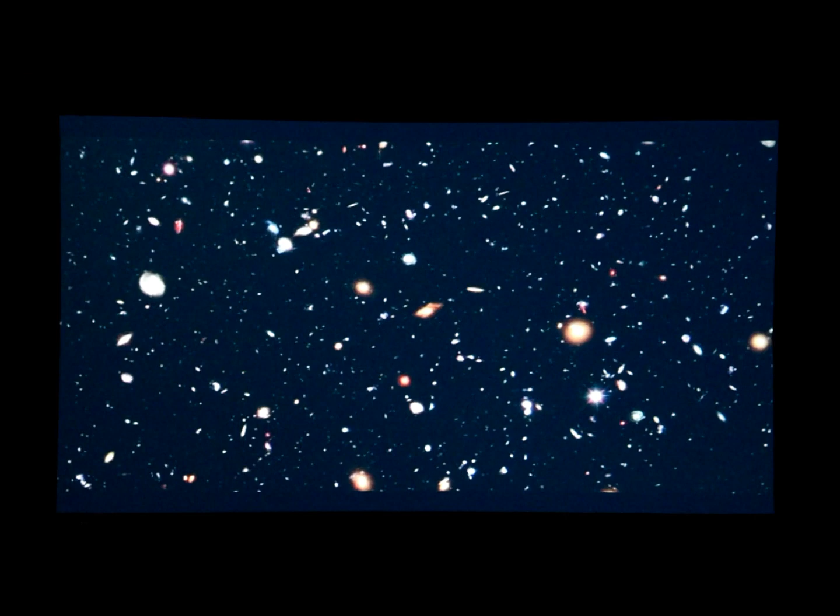As a result, although my choice of productive space has been an artistic one, spiritual space has in many ways been the primary space of my consciousness.

It is now no longer the edifice of ritual and belief that offered answers and security. Rather, it has become an engagement with the extended space of tremendous mystery, with the unknowable universe that we all live inside. This, for me, is a space of searching, of persistent inquiry, of feeling the void of doubt at the core of being human. It is an uncertain and indefinite space, which paradoxically carries within it possibilities, infinite possibility for discovery and growth.

Besides being a retrospective, this lecture is also an introspective. My aim is to share some of the inner processes and personal ideas that underlie both my body of work and my mode of practice.

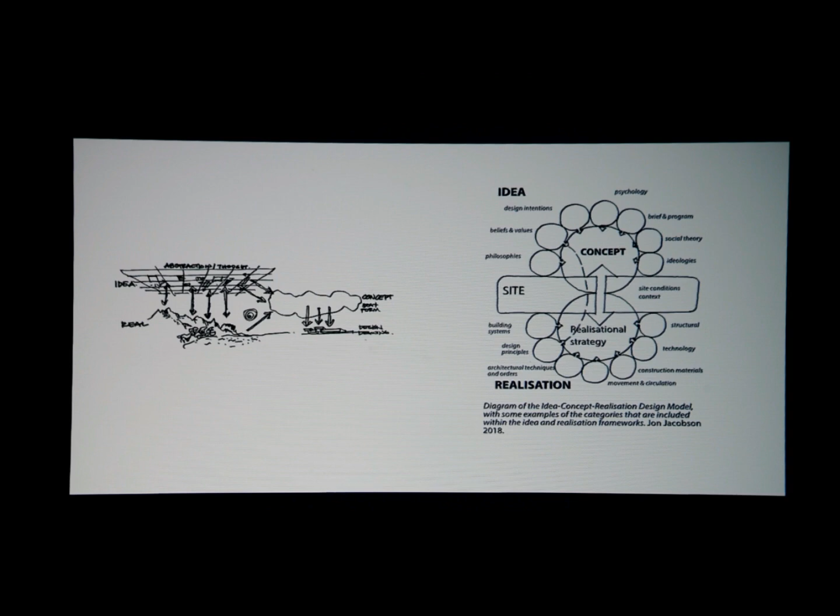What exactly is an architectural concept? I've discovered it's different for every architect I've met. For me, it is the bridge between idea and form, neither purely abstract nor purely material. It can be a poetic image, comprised of metaphor, symbol, or analogy, or a dream image, or a vague complex of images—anything that can fluidly carry meanings through the forms of this world.

A conceptual design process is profoundly integrative, fusing together many intentions and meanings into an indivisible whole. This design method allows conscious control over the relationship between the ideas, the forms, and the poetics of the project. At any point in the building process, it's possible to trace back and critically assess whether a particular form aligns with the core ideas.

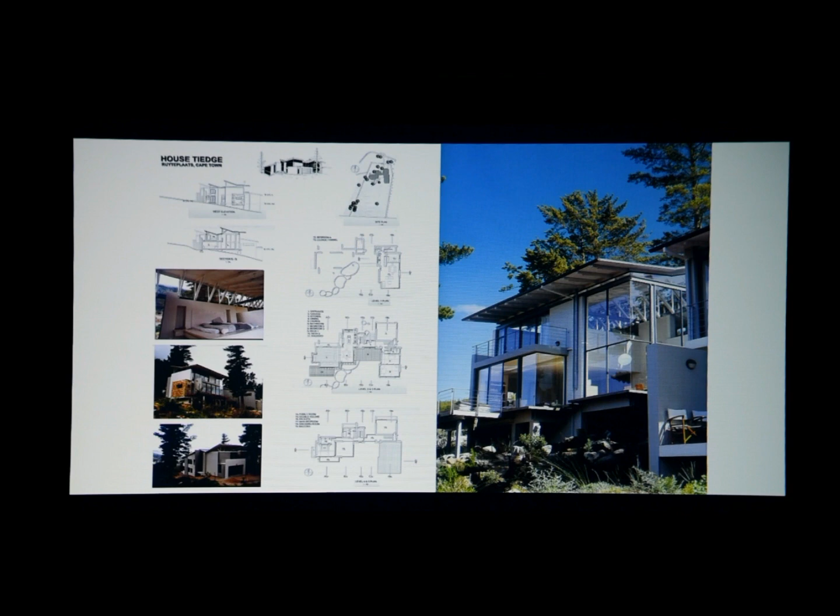In the early years of practice, design started with a diagram, resolving pragmatic concerns like orientation, circulation, and program, then proceeded to the plan. The final step was to intuitively overlay the plan with compelling architectural gestures. Here is an example of a very functional plan with a lovely floating roof, but no real central unifying concept.

The first works considered conceptual wholes were furniture pieces—these dog-like forms from the mid-90s integrated functional requirements with tectonic and sculptural concerns. The first building where I think this was achieved was this small building linked to the main house at Bo Constantia, in a way not unlike a large piece of furniture.

It is a pavilion on a narrow shelf on the mountainside, for meditation and relaxation. The intention was for an immersive experience of landscape, for the building to harmonize with and entirely disappear into its surroundings.

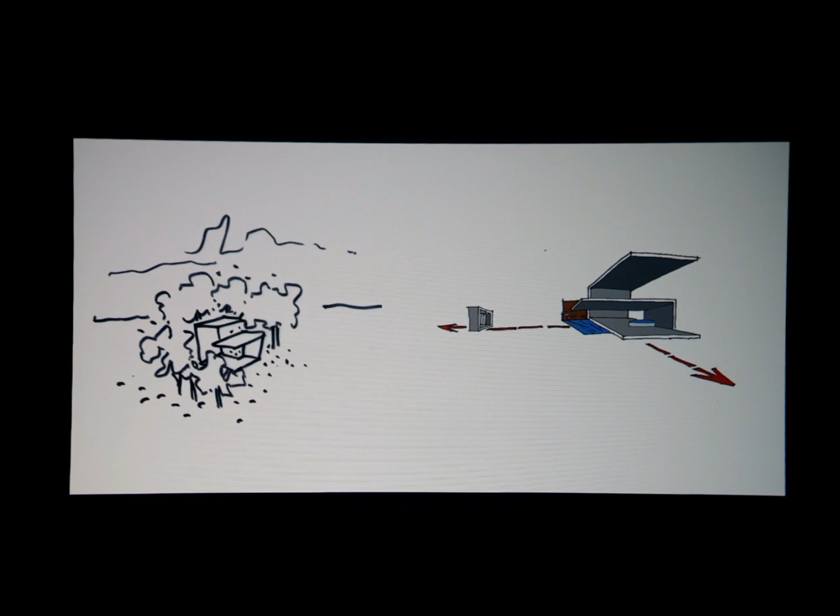The concept was a treehouse-type sculpture, nestled between the trees. It developed into two interlocking forms in a cruciform arrangement—one anchoring along the contours, the other thrusting out into space.

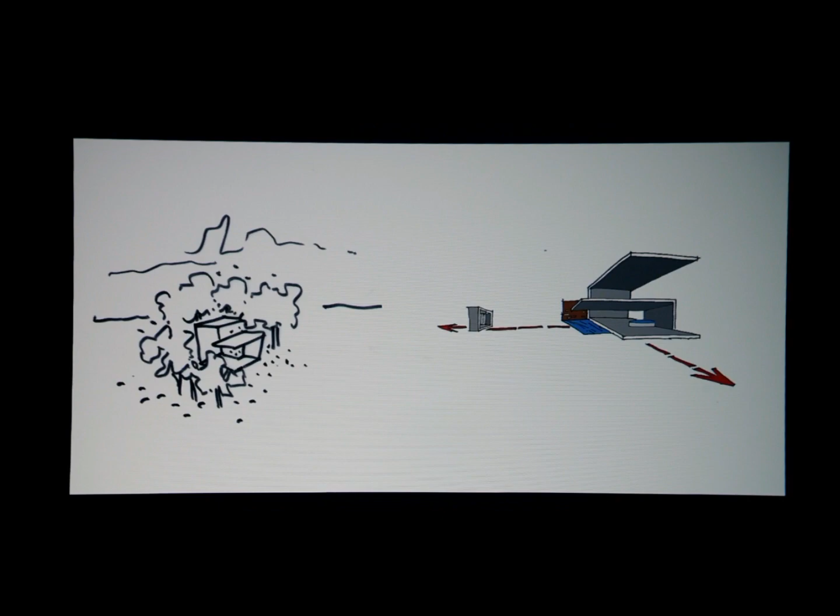The crossing of these two forms creates a complex range of spatial conditions, each with its own subtly unique character. The tension between them creates an ambiguity, a certain strangeness, a constantly shifting perceptual field—so much, really, out of this very simple gesture, a minimum of means that was more than just the sum of its parts.

I was studying cosmology and astronomy at the time. The world and our endless preoccupations within it was feeling tiny and insignificant. I think this was the first taste of grappling with the notion of the infinite in architecture—this feeling of open-endedness, of multiple meanings, and a lack of closure, true both of the world we inhabit and of the inner universe of consciousness within us.

How can an understanding of concept as a dream image contain the meanings of the project and assist in expressing them, both in the overall design conception and in every detail of the building?

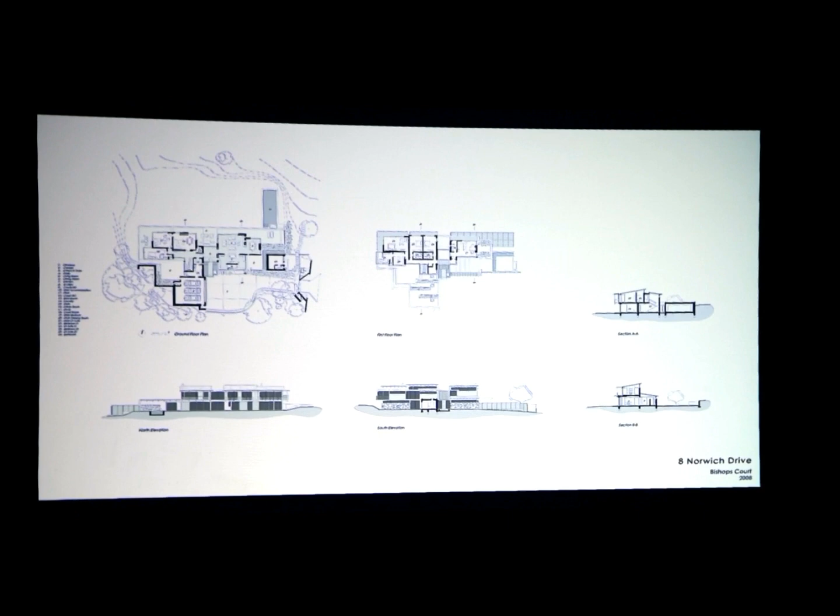I didn't interfere. I advised them on technical aspects of design realization, but my main contribution was the architecture, with the embedded meanings, and in maintaining the coherence of the concept in the face of constant, ongoing design development.

The concept started out as a response to the site, a clearing surrounded by trees. It is light, permeable, and carefully scaled down into a number of discrete masses and planar elements.

The house is organized around activated courtyards, it has a natural materiality, and it tries to form a sympathy with its site. This is the architecture. What about the design?

The organization and circulation were designed in partnership with the client. Every detail, the stair, the fireplaces, the kitchens, the bathrooms, were intensively interrogated and evolved with the clients.

Ultimately, every single one of the thousands of elements of this house reflects the client's complex spatial understanding. And this, I think, is how comfort should be defined.

Juhani Pallasmaa speaks of the difference between a house and a home. A house is the formal architectural product that contains ideas, philosophies, and values. It is as eternal as the ideas that it's built upon.

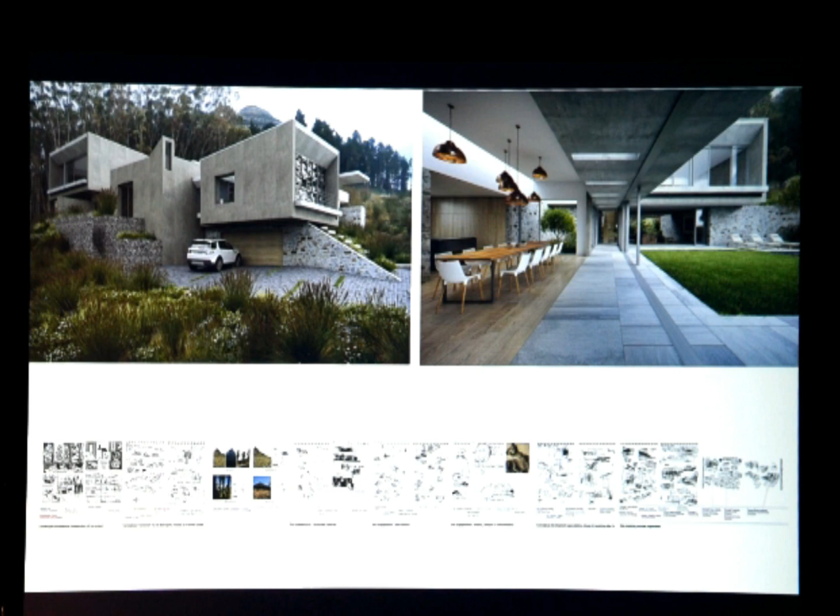As part of my master's at this university, I discovered the answer lay in my design process. I studied the conceptual design development of the current project by analyzing the drawing trail in my design notebooks. The concept for this house draws on both the rockiness of its adjacent mountainside and the permeability of its surrounding tree plantations.

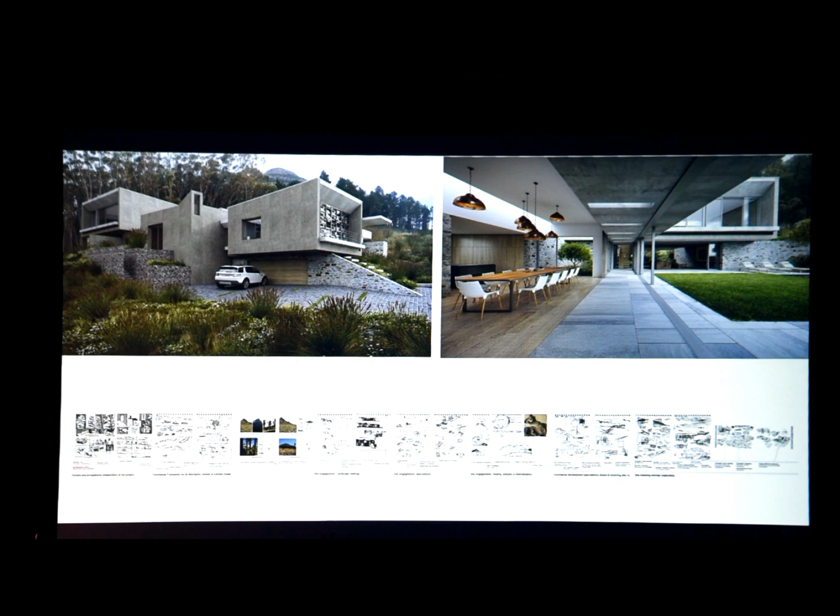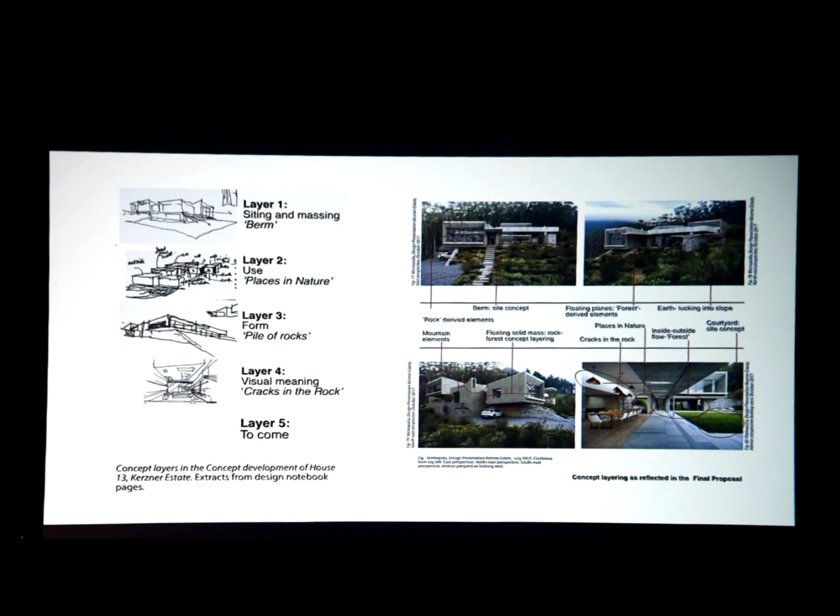These are some discoveries about design process from the masters. Firstly, multiple concepts are utilized for different operational areas of the house, like planning, siting, massing, etc., and are then layered into a sort of concept complex. A few conceptual options, sometimes contradictory, are often considered simultaneously and pursued in parallel right until the last minute.

The design process is uncertain. It doesn't grab at the first idea that comes to mind. It carries on and on, looking to accumulate more and more.

Finally, I have a number of criteria that I use to select a suitable concept for a project. Some of these are that a concept should be universal, easy for the client to understand and therefore to value, and not change. It should not be entirely dependent on any one element, in case it gets cut. It should be capable of translation along multiple tectonic paths, in case there's a problem with the budget.

This construction of concept is fluid and flexible. It allows the poetics to hang like a cloud over the project, raining on it occasionally as it changes and evolves.

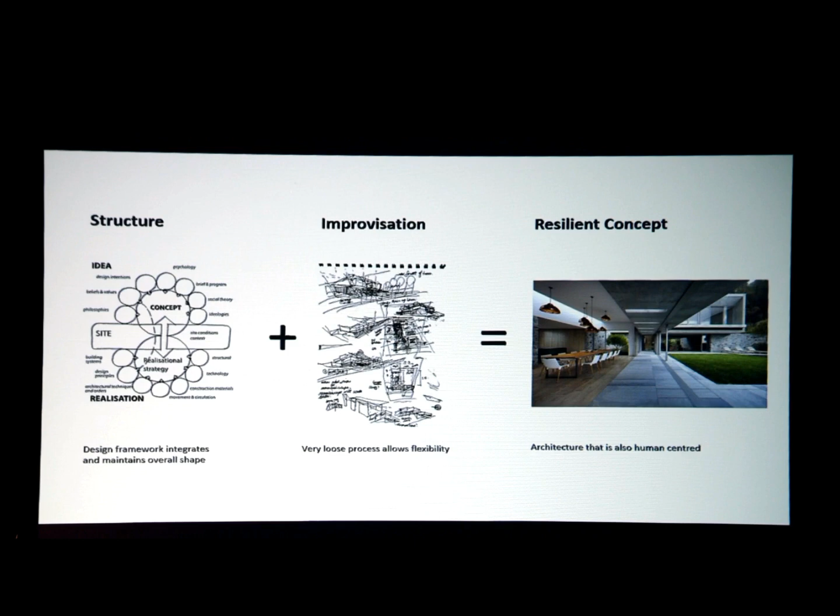What is the medium in which concept is grown, nurtured, and developed? In my case, it is drawing. When I started studying architecture after 3 years of medicine, I couldn't even draw a stick man. As a result, it is more of an investigative tool than an artistic tool.

In a typical sketch design process, a long, uncertain, and convoluted stream of drawings explore, search out, and eventually integrate ideas into a concept.

Somewhat independently of a particular project, I draw to investigate the underlying structure of things, in this case landscape, in order to understand its language, its rhythms, and its characteristics.

Drawing is also a way of gaining an intimacy with subject matter that one wishes to understand better and that one wishes to grasp and use poetically.

As discussed earlier, we are very concerned with the bridge between idea and form, with concept. A crucial function of drawing for me is to bring out new conceptual material from the subconscious, from where it has been brewing and brewing.

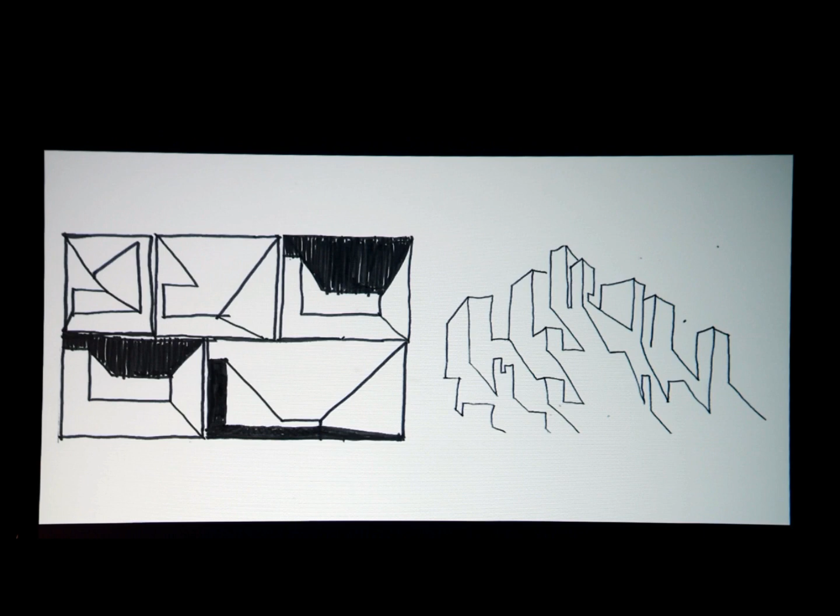Having spoken about the meanings, the conceptual framework, and the design processes that enable our architecture, we will now, for the rest of this talk, address our contextual approach to landscape and the profound effect it's had on shaping the character of our architecture.

This is the landscape that is the backdrop to many of our projects: weathered sandstone rock formations, granite boulders, forested valleys, rugged cliffs, the endless flat horizon of the sea. The sheer power of the landscape and its bleakness make all human efforts seem small and puny. The South African poet Stephen Watson, in his essay A Version of Melancholy, speaks of the entire futile effort of importing continental culture into the hugeness, the dryness, barrenness, and sheer indifference of our landscape to its human occupants. Our stylish attempts at imported architecture often look out of place, especially when not buffered by other buildings, like in a city, or by trees.

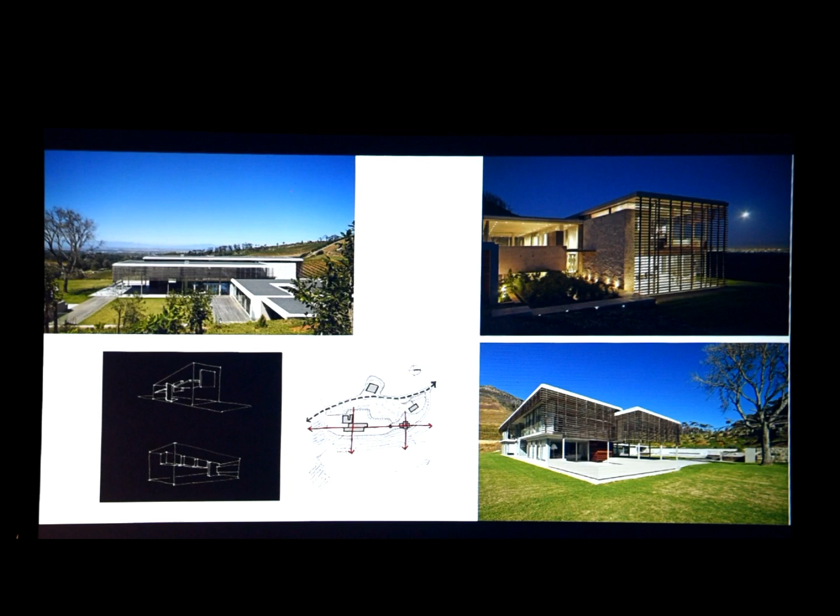But these cubes were not really solid. They were suggestions of form, with all the elements of enclosure and shelter reduced to planes, floating disconnected within them. Large voids were introduced, enclosing shadows. This concept I called sheltering sky, to encapsulate the feeling of being contained while floating in tension, in a state of becoming, on the edge of vastness.

And the vastness, the infiniteness of this landscape passes through this house like the wind. There is no definite sense of enclosure. Everything continues. There are strange gaps. There is ambiguity. But there is also form, and the form is pure.

The spatial planning concept for the house was called Heart of the Home. It places the double volume kitchen, dining, family area in the center not only of home, but of landscape, with courtyards that radiate out in all directions. The transparency creates an immersiveness which is very intense and very real.

At the same time, the house enables a lifestyle which is urbane, sophisticated, and highly social. The extroversion of its public areas is matched by the privacy and seclusion of its bedroom section, which hovers quietly overhead.

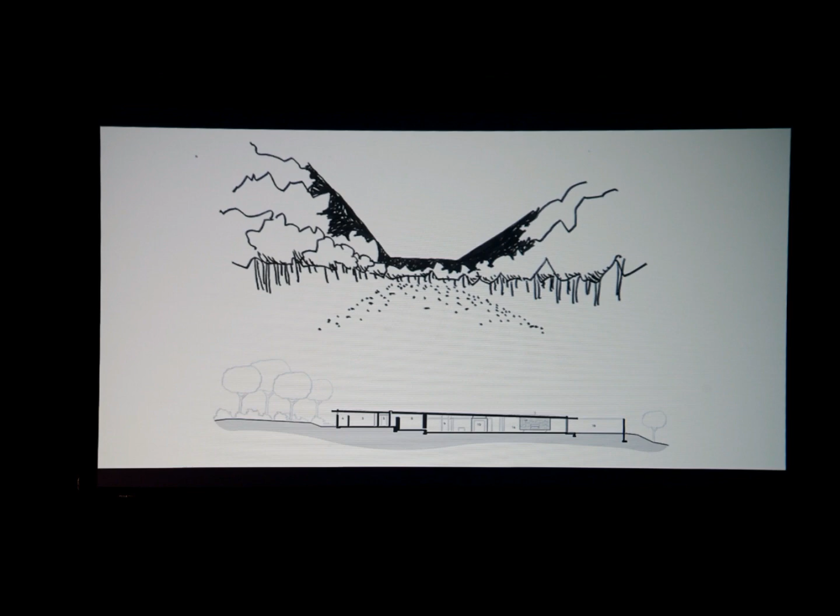The concept was a floating tree canopy of a roof, levitating over a stepped ground plane with detached wall elements under it. The real walls are the trees that surround it. The form of the house was penetrated by many courtyards, bent around a tree, completely subordinated to its surroundings. The notion of an ideal form and of a geometric order was eroded and eroded until it disappeared.

All that is left is a set of relationships with the outdoors and between detached architectural elements, the space between. And the space between relies on ambiguity for its power and its meaning. It is really the space that is left over for interpretation, for the viewer's imagination to complete the picture. What is this conversation between water, massive concrete, and hanging rock really about? They resonate with multiple meanings that don't lead to swift conclusions, but rather to a sustained state of trying to grasp the elusive.

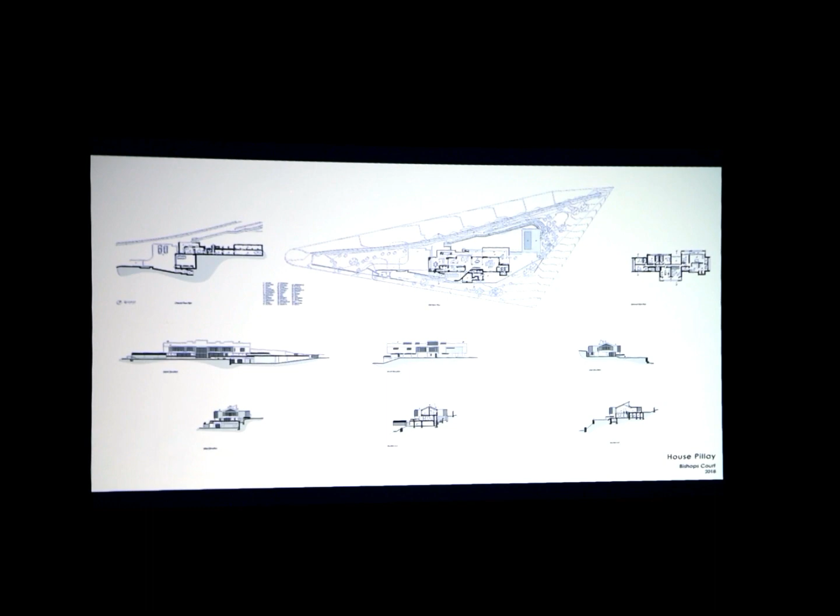I haven't spoken much about culture and architecture. This project in Bishop's Court, an elite suburb with a very traditional identity, mainly freestanding villas in a variety of historic styles, illustrates another type of dialogic relationship with the landscape. This time, it is the poetic reinterpretation of a typological form, the pitched roof, to resonate with the language of its surroundings.

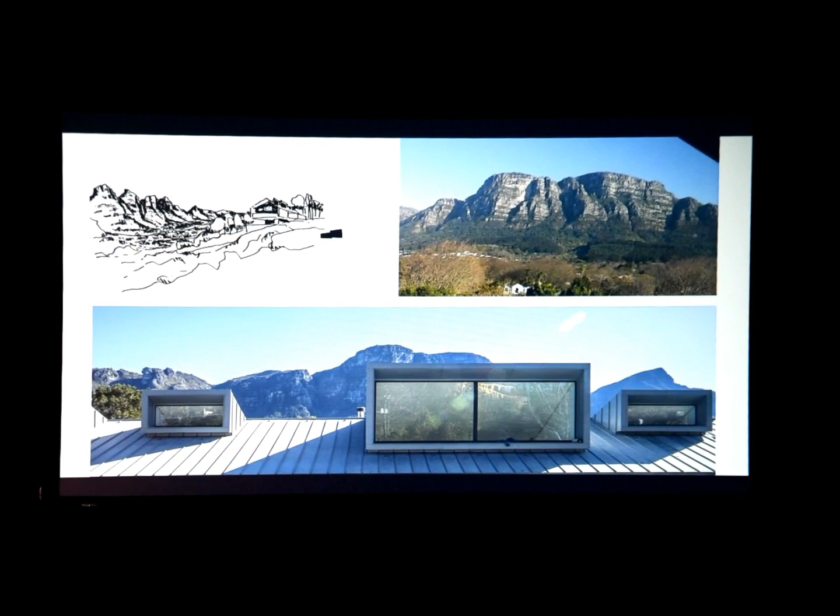This was an alteration to a very conventional, compartmented revivalist house with no relationship to ground on a very steep, oddly shaped site. It needed to be recast as an open, flowing, immersive space, strongly bound to its location.

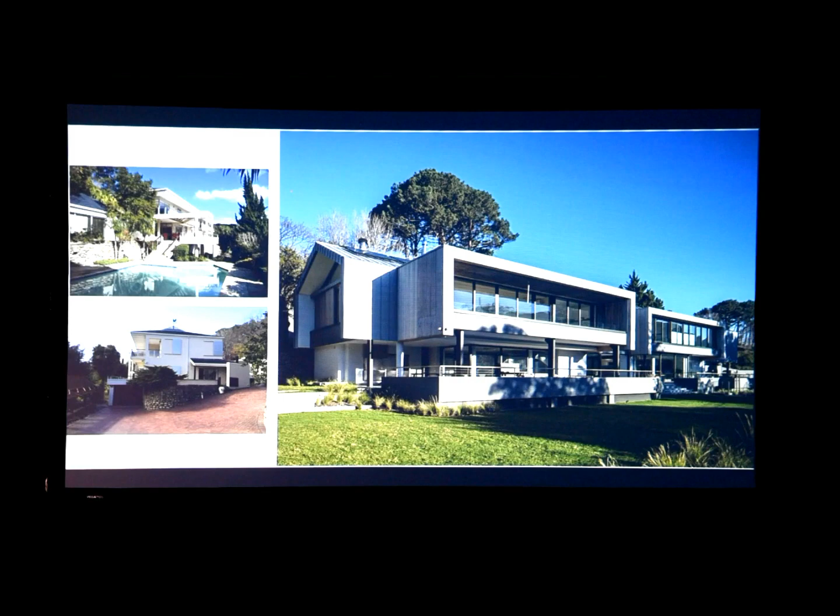The entire top floor is interpreted as roof, with dormers that are elaborated to echo the powerful cliffs of the back of Table Mountain. The house becomes a sort of floating mountain itself, new additions outside of the existing envelope are expressed as separate timber-clad, buttress-like elements.

The mountain metaphor is extended to the entrance procession, culminating in a massive abstracted rock overhang. The dormers also bring in light and views in unexpected ways into the interior.

As an abstraction of typology and landscape, the composition relies on the clarity and precision of its junctions and on the purity of its forms for its eloquence. And what started out as an interpretative journey prior to this project has continued into new metaphoricities of roof, yet to find a home.

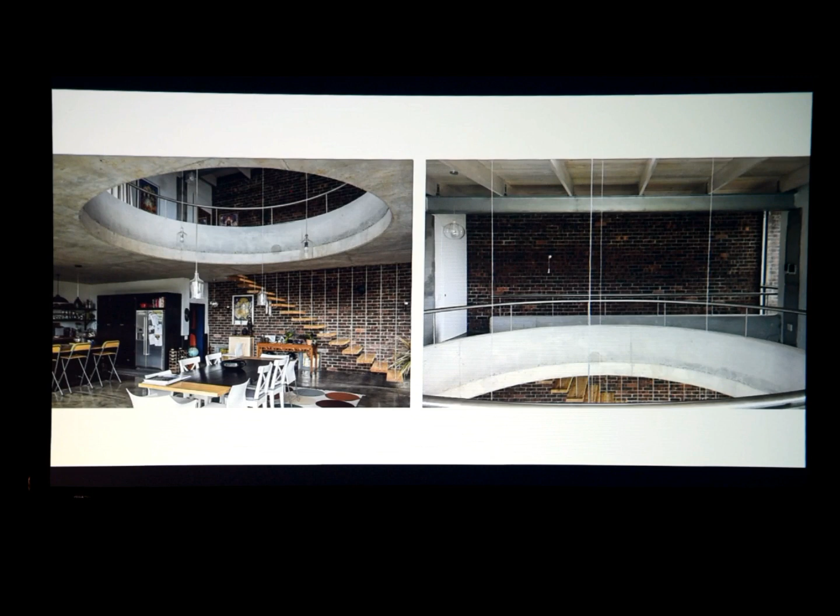And it has also manifested in the search for vitality in architecture, for a sense of livingness in the built environment. The jazz theorist Ted Gioia talks of jazz as the imperfect art because, although it is undeniably art, it embodies the unfolding incompletenesses of the lived moment. And I think that this sense of incompleteness and becoming can be embodied in architecture in the incomplete application of design rationality and in allowing our clients' improvisational spatial behaviors to coexist with our ideal geometries and spatial conceptions.

What of actual spiritual experience? The Canadian philosopher Charles Taylor, in his book A Secular Age, identifies two personalities: the modern buffered personality and the traditional porous personality. The buffered personality rationally selects which experiences of the world to take in and which to exclude. That's us, based in mind, filtering everything, ruled by an absent God who is transcendent.

The porous personality is unmediated. There are no clear boundaries between what is inside and what is outside the psyche. Everything flows in. This has been associated with the traditional and the pre-modern, and the mindset that experiences a so-called enchanted world, a God that is immanent, saturating the rocks and the trees with being.

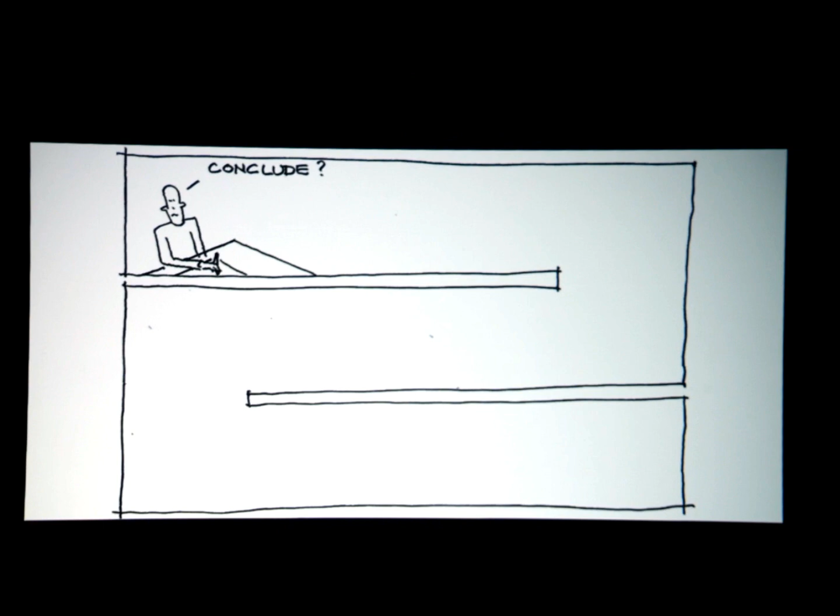To conclude, underneath all the forms that we create as architects are ideas and values, which are really what invest architecture with meaning, depth, and resonance. It may have become clear during the course of this lecture that despite the seeming clarity of our architecture, the design process and the mindset steering the process is anything but certain. It is filled with doubt, unwilling to fix on a quick answer, and it welcomes contradiction, tension, and thickness of intentionality.

And this is ultimately because at the center of our efforts as architects are humans, not buildings. Humans inside and outside of societies require stable environments, enclosure, security, order, and constancy. Yet, I believe, we can provide all of this without excluding the uncertain and the indefinite, without excluding wonder, connectedness, and engagement with what we don't know, with what really is an essential quality of reality. Thank you.